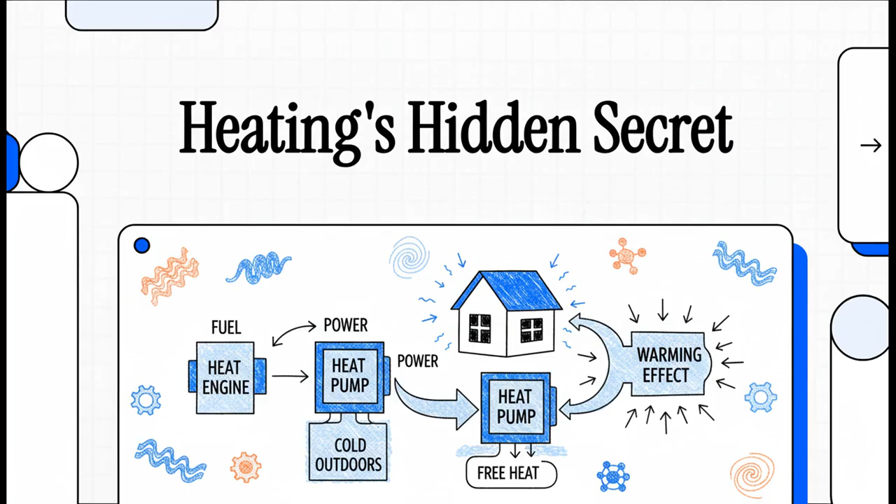I mean, really think about that for a second. What if you could slash your heating bill by a factor of 8? This isn't just some hypothetical question. What if almost everything you spend on heat isn't just a necessary cost, but actually a sign of this massive, hidden potential we're not even touching? It sounds like something out of science fiction, but according to Jaynes, it's really just better physics.

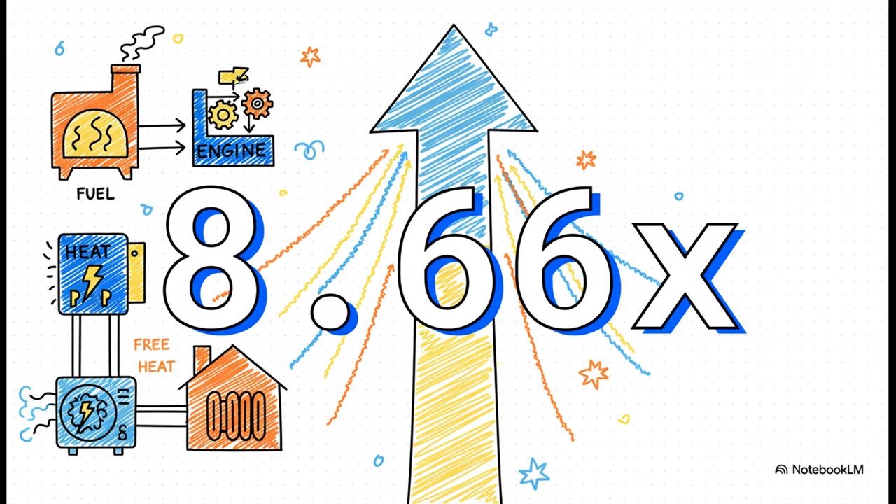And there is the number, 8.66 times more heat from the exact same amount of fuel. Now, this is not a magic free energy trick or anything like that. This is the absolute theoretical maximum you could get, and it's calculated straight from the laws of thermodynamics in a really common situation. So how in the world do we get there? Well, first, we kind of have to understand what we're doing right now.

So the way we all heat our homes and buildings right now is, frankly, from a physics perspective, just unbelievably wasteful. We're using a sledgehammer to crack a nut, and we don't even seem to realize it. Think about what's actually happening in your furnace. You've got this flame that's burning at 1,000 degrees, maybe more. That's incredibly high-quality, high-temperature heat. But what do we actually want? Just a comfortable room, maybe 25 degrees Celsius?

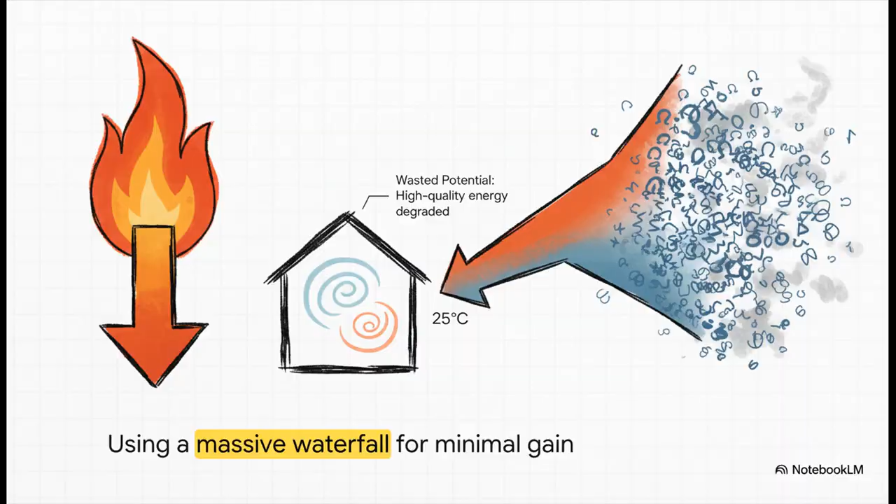By just letting that super high-quality heat degrade down to that low temperature, it's kind of like having a giant, powerful waterfall and using its incredible force just to get your hands a little wet. We're throwing away almost all of its potential. In the world of physics, this is what's known as an irreversible process. When you let heat just flow directly from a hot source to a cold one like that, the total entropy, you can think of it as disorder in the universe, goes up. And that increase isn't just a number, it's a physical measurement of wasted opportunity. It's a flashing sign that says we could have done something really useful with that temperature difference, but we didn't.

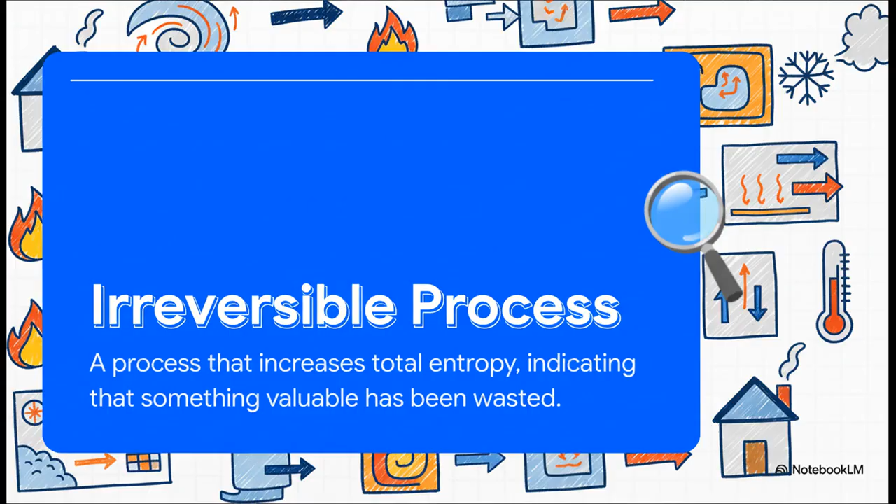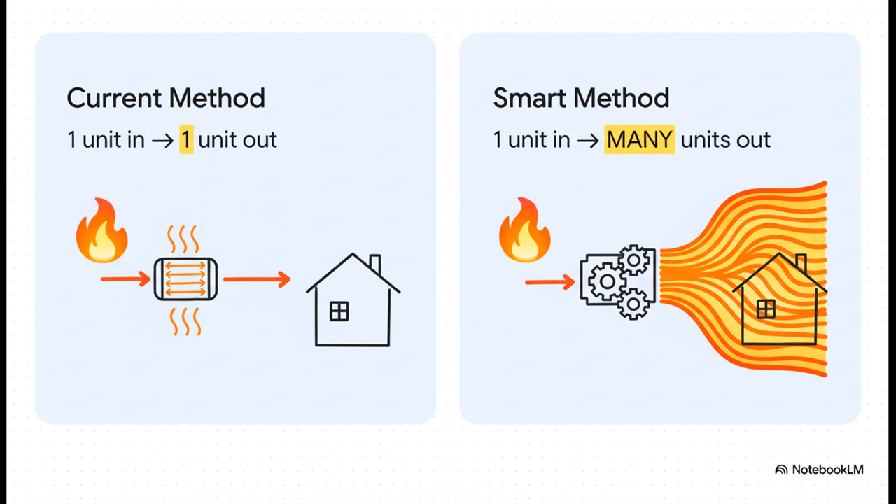Okay, so if direct burning is the lazy brute force method, what's the smarter, more elegant way? Well, Jaynes lays out this beautiful two-step process that actually works with the laws of thermodynamics to get these incredible results. And this really lays it out perfectly. On the left, that's us now. You burn 1 unit of fuel, and in a perfect world, not even counting what's lost up the chimney, you get 1 unit of heat in your room. It's simple, yeah? But it's really inefficient. Now, look at the right, the smart method. You burn that same single unit of fuel and you get many units of heat into your room. So the big question is, how is that even possible?

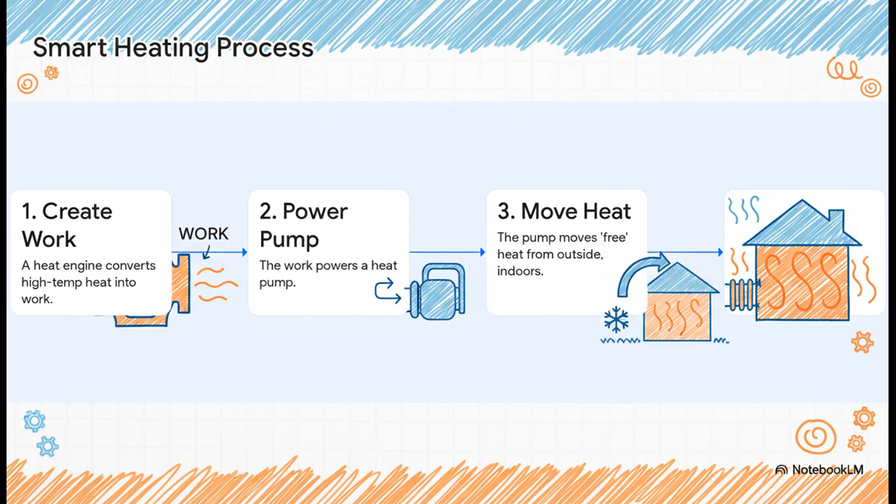And here it is. This is the elegant solution. Instead of just letting that super hot flame's heat spill into your room, you first use it to run a heat engine. The engine takes that temperature difference and creates useful work, like electricity. Then, and this is the key, you use that work to power a heat pump. A heat pump doesn't create heat, it just moves it. It literally grabs the free heat that's already in the cold air outside and pumps it indoors. And the best part? The so-called waste heat that the engine gives off while doing all this work, that gets used to warm the room too. Nothing is wasted. It's just a beautiful, cascading use of energy.

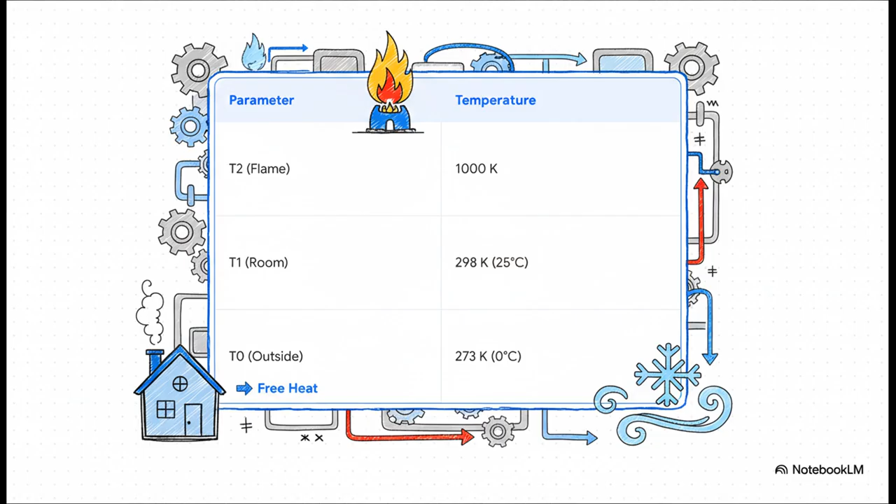Okay, so let's get into the actual numbers. Because when you run the math on this for a typical winter day, the results are, well, they're just staggering. So Jaynes sets up a really simple example. Let's say your furnace flame is at 1,000 Kelvin. You want your room to be a cozy 25 degrees Celsius, which is 298 Kelvin. And let's say outside it's freezing, 0 degrees Celsius, or 273 Kelvin. Believe it or not, those are the only 3 temperatures you need to figure out the absolute maximum possible heating efficiency.

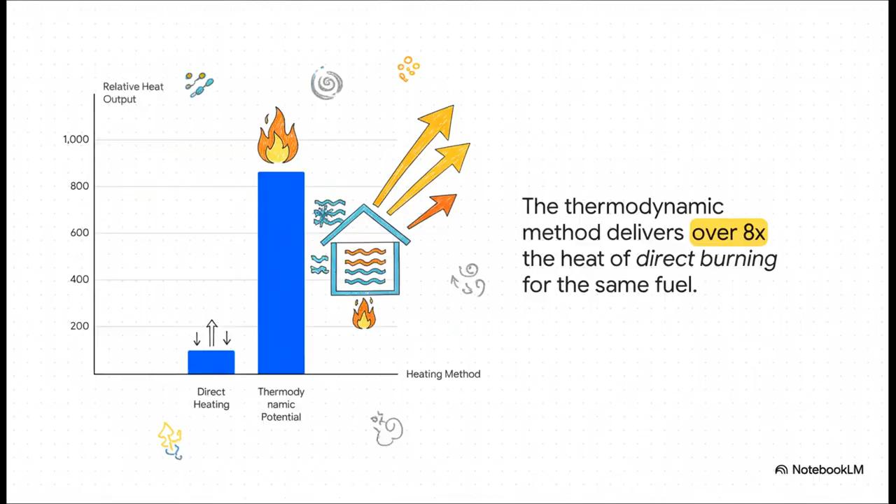And this isn't some weird fluke that only works at exactly 0 degrees. The paper actually includes a chart that shows this is a general principle. In fact, the closer the outside temperature is to your room temperature, the more ridiculously efficient the whole process gets. Even in really cold climates, average gains of around 5 times are, in theory, totally possible.

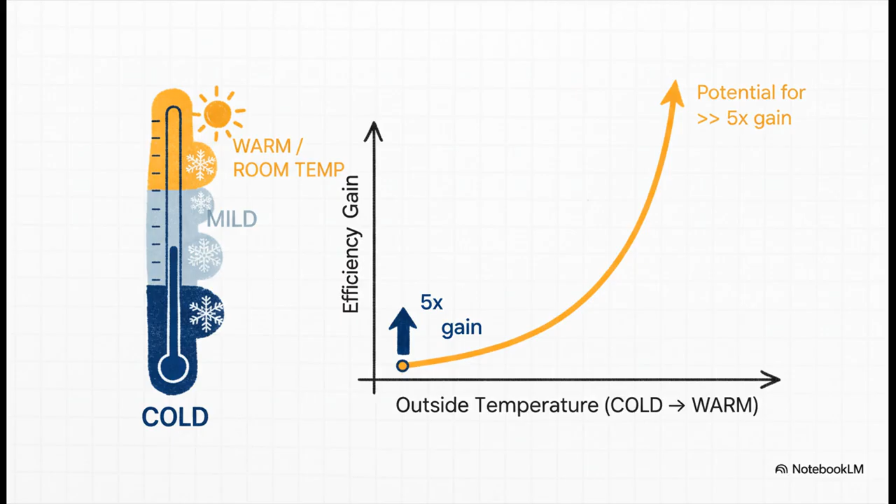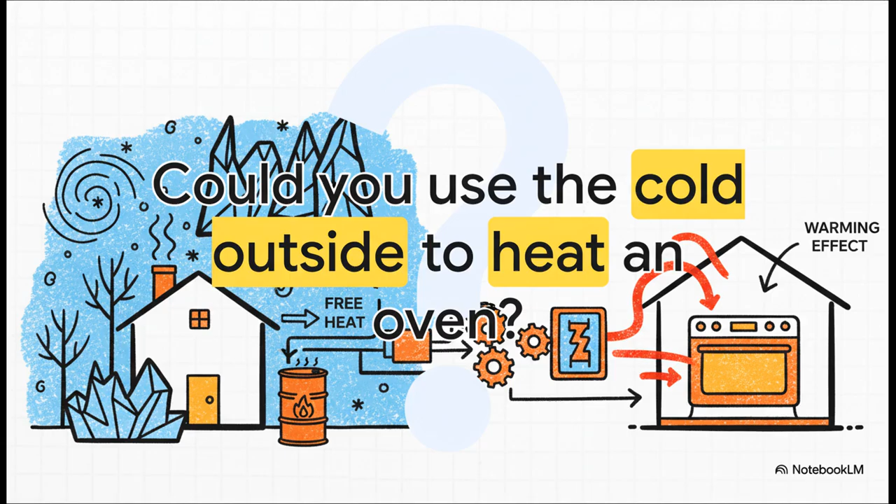As if completely upending how we think about heating wasn't enough, Jaynes then uses this exact same logic to come up with something even more mind-bending. He calls it the free oven. I mean, that just sounds impossible, doesn't it? How could a freezing cold day possibly help you bake something? It feels like it breaks our intuition, maybe even the second law of thermodynamics that says heat flows from hot to cold. But it doesn't. It's the exact same principle, just running in a different direction.

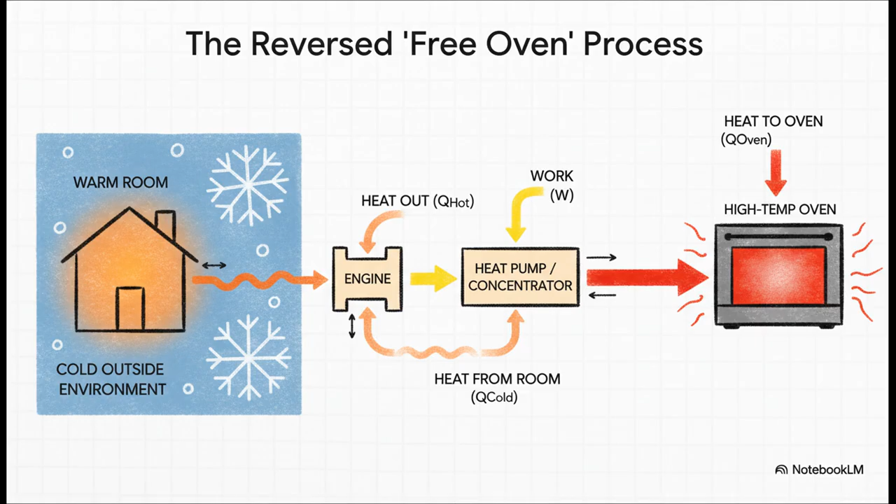You use the temperature difference between your warm room and the even colder air outside to run an engine. That engine's work powers a heat pump, but this time the pump takes heat from your room and concentrates it into a small insulated box, an oven, making it much, much hotter. And get this, the colder it is outside, the bigger the temperature difference and the more efficiently the whole thing works. The punchline? When you're done, you can theoretically reverse the process, put the heat back in the room, and restore everything. The net operating cost is zero.

And that really brings us to the most powerful takeaway, and it comes from Jaynes himself. This isn't science fiction. It's not some loophole in the laws of physics. It is the laws of physics. The only thing standing between us and this kind of incredible efficiency is engineering. The science is solid, the path is there, it just needs someone to build it. Jaynes actually writes that the person who figures this out and makes it a reality will be one of the world's great benefactors. It really makes you wonder, doesn't it? If this incredible potential for efficiency is just sitting there, written right into the laws of nature, what other amazing opportunities are we overlooking every single day?